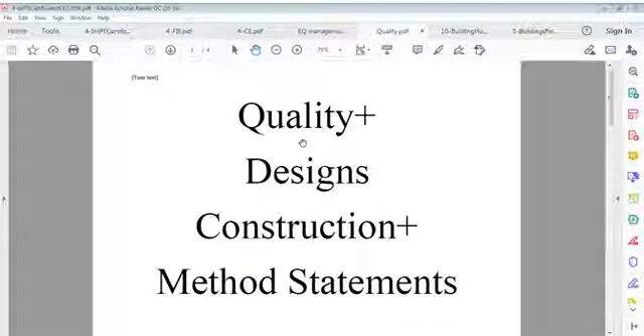But because you can't have experience of structure, you look at finishes, decoration, paint, good work, doors, windows, lifts, service, how fittings are working, electrical fittings, how HVAC working, what is color of this, what floor it is. You concentrate on that rather than asking questions about structure. And that is point where lapse lies in. According to my understanding, lapse lies there.

Where? Structure. Maybe it is building apartment, your plotted house, or flyover, or road construction, it may be sewer line, water line for public use. Wherever you are involved in walking, you walk on footpath every day, you walk in street, you take tap water or drink bottled water, wherever you do whatever, you have many questions and you just sometimes agree on whatever it is, meaning you say oh it's beyond my control.

Yes that is beyond your control. But whatever is within your control, do you take care of that? You don't take care of that. You only pay, okay I am paying, I am booking for this house, I must get it in 3 years. That's what you think, and you think it's a lottery if you get it in time, or you wait for another 3 years. Government knows, public, those agencies who deal with that, they know. And promoter knows, and agent knows, and at end you know that you won't get it in time, even then you pay. You don't realize the merits and demerits, good or bad of that.

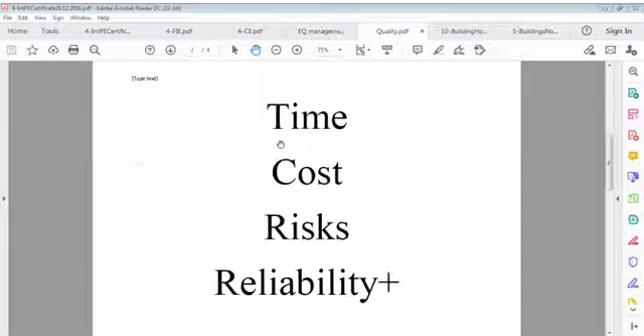So that's the point I like to emphasize: what is quality, what is design, what is construction, what is method statement, what is time, what is cost, what is risks, reliability, what is analysis or synthesis, what is thinking, what is contemplation of application. This is all I wanted to talk of in this way, so that we can at least understand what we are going to do before going further, because this talk is for method statements. That's a very important point we have to consider. I talked yesterday of something, and before yesterday of something else - this is in continuation of all those, that we are here to sit and see what we can do, and that's a very important point.

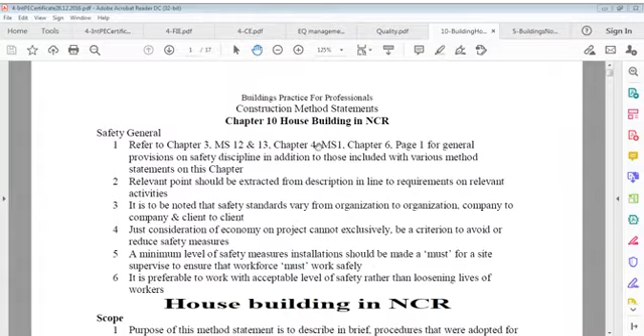So in this case, let us say this is - I say here, this is a building, a non-plant building is here. It's shown as non-plant building, meaning buildings which I talked of, and therefore I also talked of this building - you may say this is building house here, which we talked of. And also I talked of earthquake management, something not directly related to earthquake, but the role of the site engineer is very important in this, which I was talking about - the role of the site engineer.

This is my certification of chartered engineer, just for information. This is my certificate of fellow. I am Institution of Engineers fellow in India. This is my fellow, and this is reapplied now, the old one is gone. This engineer certificate is valid up to 30th September 2020.

I already applied, I didn't get an answer till now, but still I am on roll as International Professional Engineer in India. That means I can use the INTPE India title, under statutory rules, under the International Professional Engineers Agreement, where 15 countries are members, and India, Bharat, is one of them.

Just for your information, this FIE I'm closing now, and also this chartered engineer certificate I'm closing, because it was only for informative purpose, and I can close it.

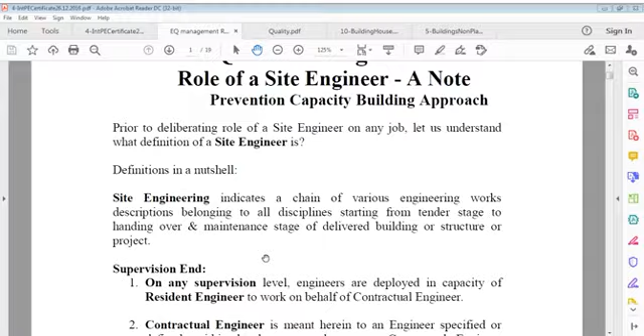Now I'm deliberating again on the role of site engineer, note, prevention, capacity building approach. I defined this yesterday as well, that prior to deliberating the role of site engineer or whatever job, we have to understand what it means. We talked of site engineering - what is it, in a nutshell? It indicates a chain of various engineering works and descriptions belonging to all disciplines, starting from tender stage to handing over and maintenance stage of the delivered building or structure or project.

Then I talked of supervision end and contractual end, where I described what supervision end is - engineer is responsible for supervision, resident engineer is responsible. Engineer is a person defined in the contract, contractual engineer, or engineer defined in contract. It's not a simple title, it's a title in contract.

Contract is a document executed between owner and contractor. Owner is the person whose project it is, who invests money, who takes all liability, whereas contractor is the person to whom work is given to be executed - maybe EPC or construction work, that's called contractor.

So contractor and owner have contractual relations. Owner or promoter, whatever you call that person, has a contractual relation - meaning those two persons have an agreement that exists between owner and contractor. Contractor is second party and owner is first party on contract. That is their contractual relation. It may be a construction contract, design delivery contract, design and construction delivery contract, whatever capacity - so engineer is not a party in that contract.

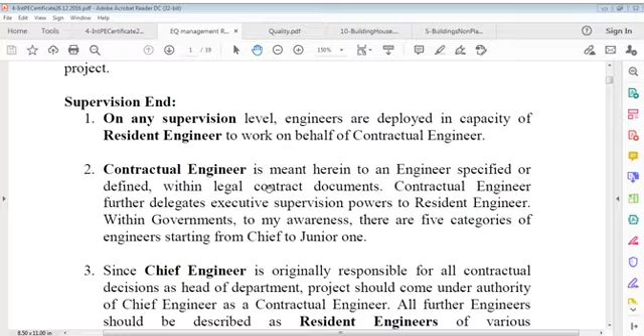I'm not defining our chief engineer, you know that well. The chief engineer is there everywhere in government department, who is a contractual engineer, and employs a chain of engineers who are all subordinates or resident engineers. If you go to construction end, that's where I defined contract, and on supervision end there's another contract.

That was only the purpose that I wanted to explain to you, what it is - you should know how a project works. And of course there's third party consideration, which I will explain to you later on. Now, just briefly, I'm telling you the role of engineer, and role must be written in EQ management in this.

Don't be confused with that, because this was a file I addressed to many engineers in some state in our country, for training engineers for purpose of engineer roles. So don't worry about that. This role of site engineer, whether EQ related or not, exists everywhere.

So engineer is defined as the person responsible for every aspect of contract, not civil alone, all disciplines, including resident engineer, associates, etc., and similarly contractors. So there are two contracts, three parties on every project. Basic fundamental: three parties, three persons, you can say a triangular system.

One corner is owner or promoter or builder, whoever. That is party number one on both contracts - construction contract or EPC contract, or design organization contract, or management services contract. One contract is construction contract between owner and contractor. The other contract exists between owner and engineer, or the engineer may be staff - it doesn't matter.

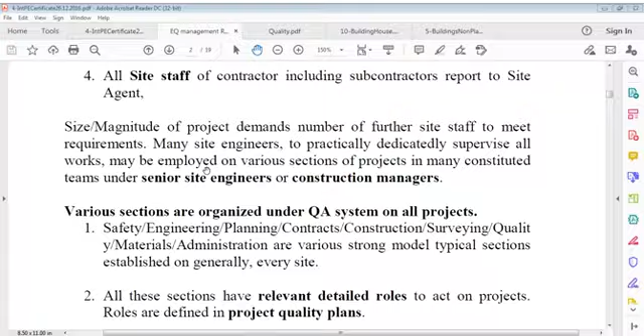Size and magnitude of project demands a number of further site staff to meet requirements. Many site engineers are practically dedicated to supervise all works, may be employed on various sections of projects, and many constitute teams under senior site engineers or construction managers.

Now various sections are organized under a quality system on all projects, and you know this very well, it exists everywhere nowadays. Previously, in the 1980s and 1990s, this was combined work for one engineer - safety plus engineering plus planning plus contracts plus construction plus surveying, all done by one or two persons on site, because in those days there was no such quality system, no existence of that.

So now there is safety, which is number one - not an authority, but number one in precautionary measures, number one in direction. Because wherever you go, wherever you work, safety is considered first. You can't go blankly, you cannot wear slippers and go, you cannot keep your head exposed to weather, you can't do that. You can't just walk in everywhere. You must abide by safety, that's called HSE - health, safety and environment - and also ergonomics.

So you can say health, safety, environment and ergonomics. Health means you should be healthy, you should be safe, you should work in a good environment, and you should use the science or engineering technology of ergonomics. So safety means you should be safe, your subordinate should be safe, your crew should be safe, your site should be safe. That is what safety is - HSE we call it generally: health, safety, environment, and then ergonomics.

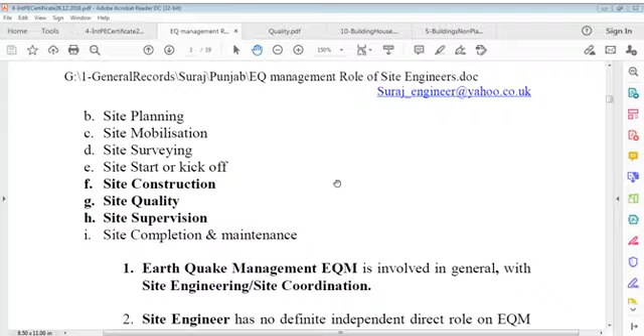Now let's discuss the role of site execution. Based on this discussion, you can see there's planning, mobilization, surveying, kickoff, construction, quality supervision, and completion. Earthquake management is involved in general with site engineering coordination, and the site engineer has no definite independent direct role in earthquake management, but has an indirect role to implement design, engineering and project decisions to comply with the quality system, with strongly extended base support by all responsible discipline sections on the project.

The site quality plan and site safety plan must describe functions as well as supporting roles to all responsible engineers and personnel, officers, directors, everybody. You may call these the project quality plan, project safety plan, and project plan itself - project plan empowers both, and gives you the complete particular plan for that project.

I'm not talking of the general plan of companies or organizations. These three plans - project plan, quality plan, safety plan - are very important. If they are described well, it's fine. Plans give direction, and these can be updated from time to time, for all projects.

Then the site agent's representative is responsible in all respects for site roles, which multiply as follows. First is design review - it is the first involvement to make sure that design specification requirements have been met and included within the design philosophy.

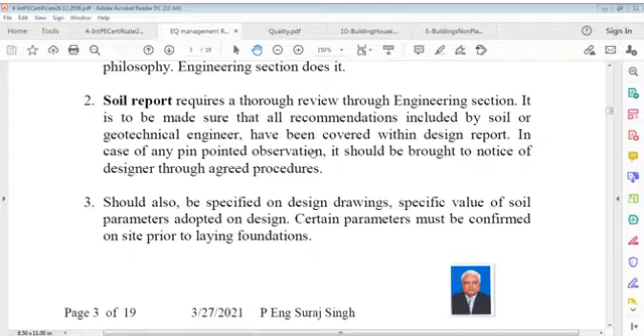The engineering section does this. The soil report requires a thorough review. Through the engineering section, it must be made sure that all recommendations included by soil or geotechnical engineering have been covered within the design report. In case of any pinpointed observation, it should be brought to the notice of the designer through an agreed procedure. It should also be specified on design drawings, a specific value of soil parameters adopted in design. Certain parameters must be confirmed on site prior to laying foundations.

In case localized soil doesn't allow the adopted design parameters, the design should be reconsidered. It's the responsibility of the site engineer to conduct these tests in all major areas of the site using the services of a laboratory or material testing laboratory - it's not written here, but it is like that. The site quality engineer has to be involved for quality accuracy of the test. Any variation from the soil report should immediately be reported to the soil laboratory and designer.

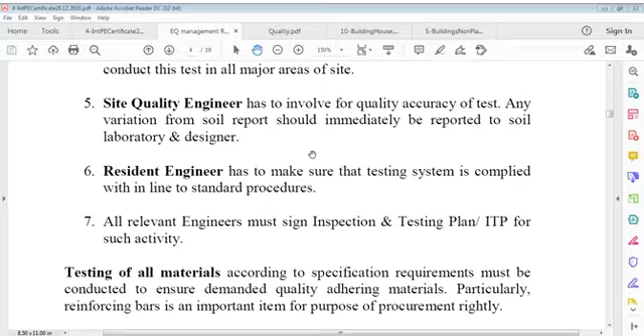The resident engineer has to make sure that the testing system is complied with, and conforms in line with standard procedures. All relevant engineers must sign the inspection and testing plan, called ITP in short, for such activity.

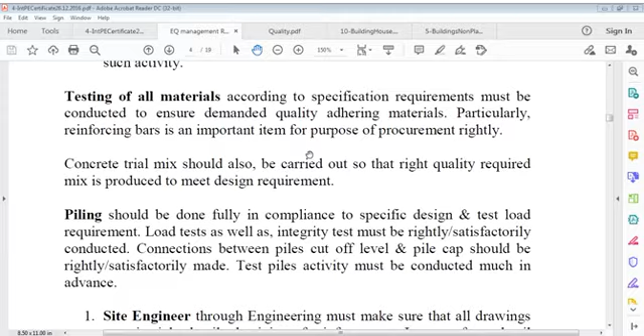Testing of all materials according to specification requirements must be conducted to ensure demanded quality. Adhering materials, particularly reinforcing bars, are an important item for procurement purposes. Concrete trial mix should also be carried out so that the right quality mix is produced to meet design requirements, and piling should fully comply with specific designs and test load requirements.

Load tests as well as integrity tests must be satisfactorily conducted on piles after they are cast in, whether continuous flight or a different type. Connections between piles, cutoff level, and pile cap should be rightly and satisfactorily made. Test piles activity must be conducted well in advance.

The site engineer must make sure that all drawings contain the right detailing of reinforcement. In case any detail is missing, a query should be raised immediately for confirmation. Arrangements must be indicated on typical standard drawings by the designer.

It's very significant for proposed materials to resist earthquake forces, and included materials should conform to standards without any adjustments. No compromise should be made in the quality of these materials.

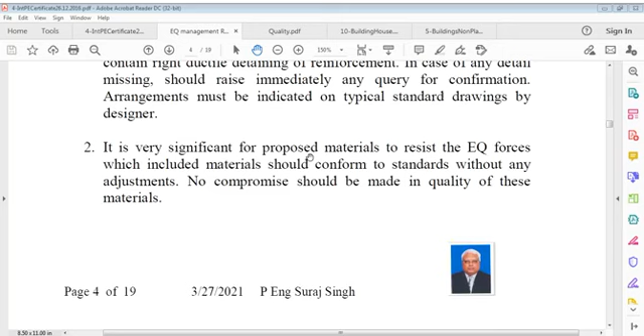Generally, reinforced cement concrete is used in various buildings and is considered in designs. It's therefore significant to produce concrete works of good quality, and no batch of concrete should be allowed to be poured unsupervised.

The site engineer must ensure that whatever precautions are required on site have been explained to all responsible skilled craftspeople, workmen, and the work crew, as well as supervisors like foremen, supervisors, and charge hands.

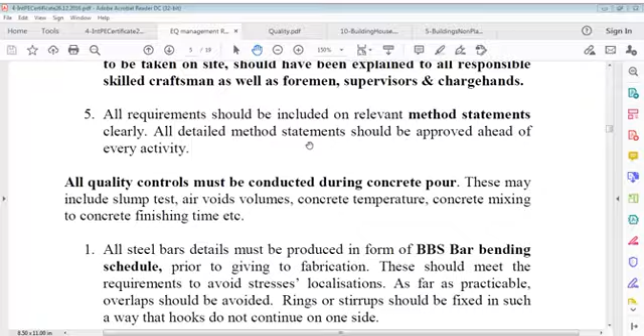All requirements should be clearly included in the relevant method statements. All detailed method statements should be approved ahead of every activity, and no activity should be done without an approved method statement available.

All quality controls must be conducted during the concrete pour. This may include slump test, air voids, volumes, concrete temperature, and concrete mixing to finishing time, etc.

All reinforcing steel bar details must be produced in the form of bar bending schedules prior to fabrication. These should meet requirements to avoid stress localizations. As far as practicable, overlaps should be avoided, and rings or stirrups should be fixed so that hooks do not continue on one side.

It should be remembered that reinforcing bars change behavior drastically during earthquake action. Bars provided for gravity loads start accepting horizontal shear distributed stresses, thereby forcing beams to work partly as columns and columns to work partly as beams.

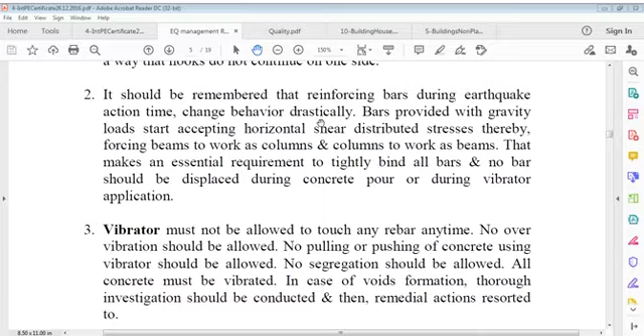That makes it an essential requirement to tightly bind all bars, and no bar should be displaced during concrete pour or during vibrator application.

The vibrator must not be allowed to touch any rebar at any time. No over vibration should be allowed, and no pulling or pushing of the concrete mix using the vibrator should be allowed. No segregation should be allowed, and all concrete must be vibrated. In case of voids formation, a thorough investigation should be conducted and then remedial actions resorted to.

Proper inclusion of concrete spacers, also called concrete covers, should be made at the right location so that rebars stay intact during pouring. It has generally been noticed that this item is neglected by site engineers and other persons. Cover is too serious an issue to be overlooked.

Precast covers, well cured, can be used. Plastic covers, if strong enough to bear the loads of foundation rebars, can also be used.

Formwork should be erected based on correct and safe designs of preparatory works. Safety is of utmost importance, and safety-first criteria should be fully considered and implemented.

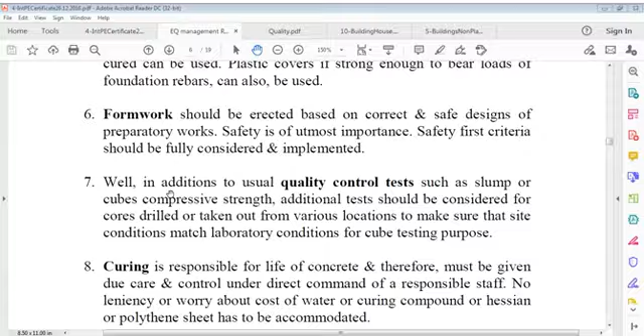In addition to usual quality control tests such as slump or compressive strength cubes, additional tests should be conducted on cores drilled or taken out from various locations to make sure site conditions match laboratory conditions used for cube testing.

Curing is responsible for the life of concrete and must be given due care and control under the direct command of responsible staff. No leniency or worry about the cost of water, curing compound, or hessian or polythene sheet should be accommodated.

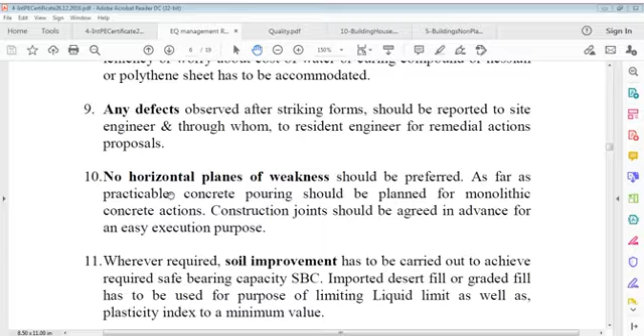Whatever defects are observed after striking the forms should be reported to the site engineer, and through him to the resident engineer, for decisions on remedial action proposals.

No horizontal planes of weakness should be preferred. As far as practicable, concrete pouring should be planned for monolithic concrete actions, and construction joints should be agreed in advance for easy execution.

Wherever required, soil improvement has to be carried out to achieve the required safe bearing capacity. Imported desert fill or graded fill has to be used to limit the liquid limit as well as the plasticity index to a minimum value.

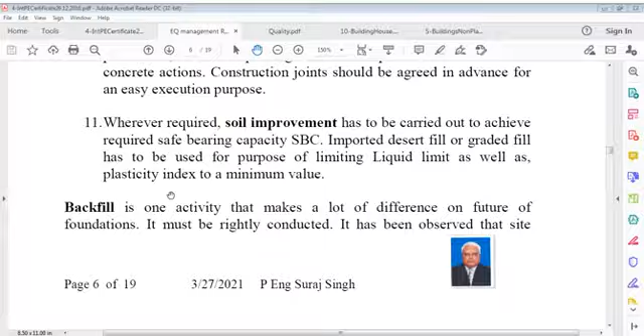Backfill is one activity that makes a lot of difference on the future of foundation. It must be rightly conducted. It has been observed that site engineers try to neglect its supervision and save project time by filling thicker layers than required. It's not a good practice.

Backfill should be in good compliance with agreed specifications to achieve 95 to 98% field density. General fill can be compacted to 90% field density.

Construction sequence should be correctly followed during the scheduling stage. Foundation should be planned, as far as possible, to be cast monolithic. Columns should be cast first. Beams and slabs should be cast one time monolithic. All connections should be done to meet requirements.

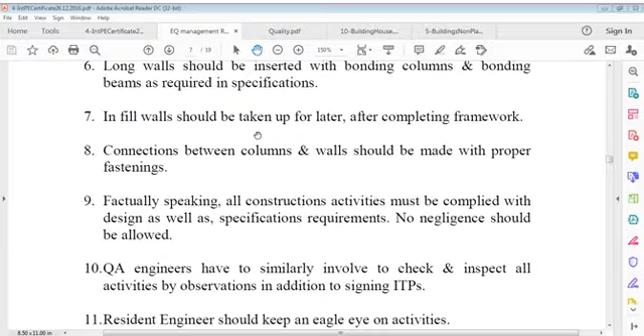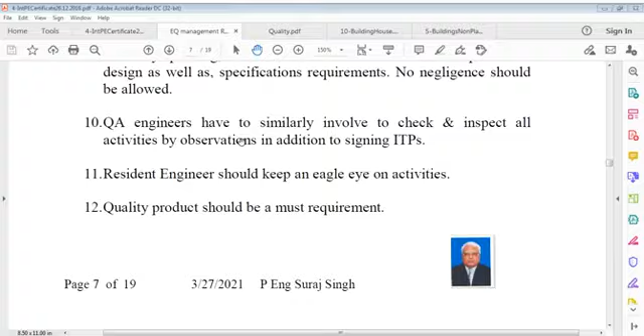Factually speaking, all construction activities must comply with designs as well as specification requirements. No negligence should be allowed. Quality engineers have to be involved to check and inspect all activities by observation, in addition to signing ITPs. The resident engineer should keep an eagle eye on activities. Quality product should be a must requirement.

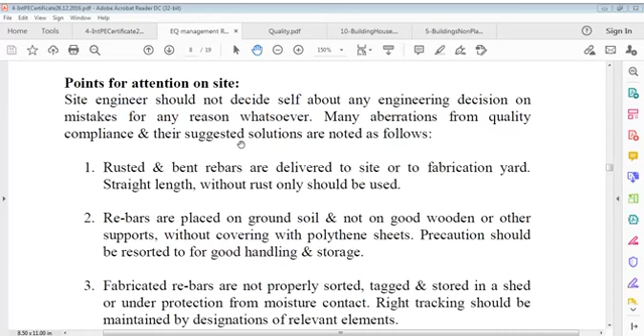Points for attention on site: the site engineer should not decide by itself on whatever engineering design or engineering decision, on mistakes, for whatever reason whatsoever. Many aberrations from quality compliance and their suggested solutions are noted as follows.

Rusted and bent rebars are delivered to site or to the fabrication yard. Straight bars without rust only should be used.

Reinforcing bars are placed on ground soil and not on good wooden or other supports, without covering with polythene sheets. Precaution should be taken for good handling and storage.

Fabricated rebars are not properly sorted out, tagged and stored in shed or under protection from moisture contact. Proper tracking should be maintained by designations of relevant elements.

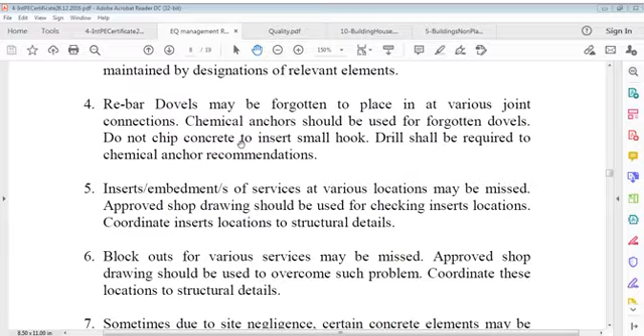Reinforcing bar dowels may be forgotten to place at various joint connections. Chemical anchors should be used for forgotten dowels. Do not chip concrete to insert a small hook. Drilling shall be required per chemical anchor recommendations.

Inserts and embedments of services at various levels and locations may be missed. Approved shop drawings should be used for checking insert locations, and these should be coordinated with structural details.

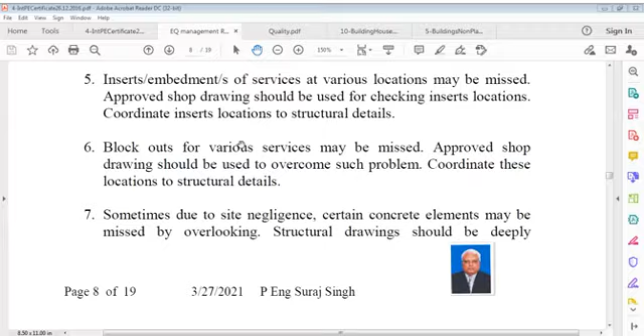Block-outs for various services may also be missed. Approved shop drawings should be used to overcome such problems, with locations coordinated to structural details.

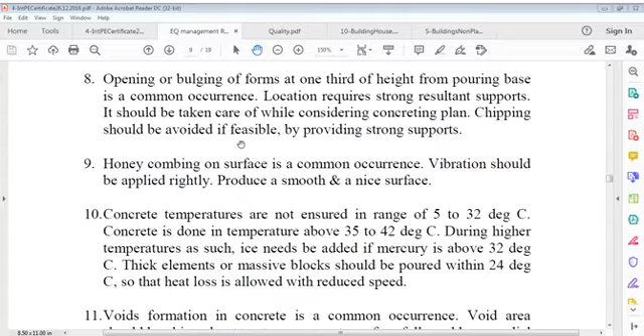Opening or bulging of forms at one-third of the height from the pouring base is a common occurrence. Based on experience, this location requires strong resultant supports. It should be taken care of while planning concreting, and chipping should be avoided if feasible by providing strong supports.

Honeycombing on the surface is a very common occurrence. Vibration should be applied correctly to produce a smooth and nice surface.

Concrete temperature is not always ensured to be in the range of 5 to 32 degrees Celsius; concreting is sometimes done at temperatures above 35 to 42 degrees Celsius. During such higher temperatures, ice needs to be added if the mercury is above 32 to 35 degrees Celsius. Thick elements or massive blocks should be poured within a 24-degree Celsius range so that heat loss is managed with reduced speed and reduced quantity.

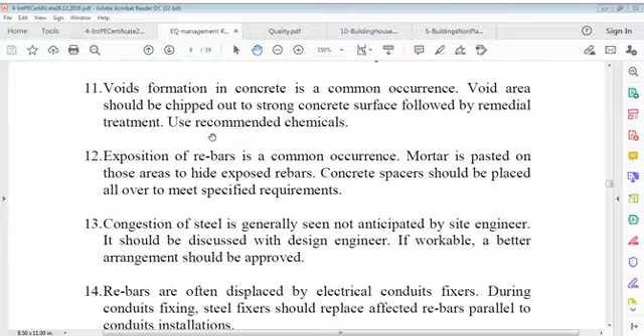Voids formation in concrete is a common occurrence. Void areas should be chipped out or removed down to strong concrete surface, followed by remedial treatments using recommended chemicals or concrete.

Exposure of rebars or reinforcing bars is a common occurrence, and mortar is sometimes pasted on those areas just to hide the exposed rebars. Instead, concrete spacers should be placed all over to meet specified requirements, vibrators should be applied correctly, and the water-cement ratio or mix must be ensured depending on requirements. I have not written all this, but I am telling you what happens - we have to take care of concrete composition and concrete delivery very well, so that we do not create any voids, and there should be no carelessness.

Once one vibrator is done and other concrete comes, it should not be left unvibrated. Every concrete batch is left for half an hour before the next one comes in, so you must vibrate that. Do not leave it unvibrated.

Congestion of steel reinforcement is generally seen, not anticipated by site engineers. It should be discussed with the design engineer, and if workable, a better arrangement should be approved, either reducing reinforcement bars or increasing their size so that congestion is avoided.

Congestion also causes problems. Reinforcing bars are often displaced by electric conduit fixers. During conduit fixing, steel fixers should replace the affected rebars parallel to the conduit installation.

For higher size rebars, overlaps do not work safely and perfectly, and I don't have much confidence in overlaps to that extent. Mechanical connectors should be used instead. Generally, reinforcing bars of diameter 20 mm and above work better when mechanical connectors are employed.

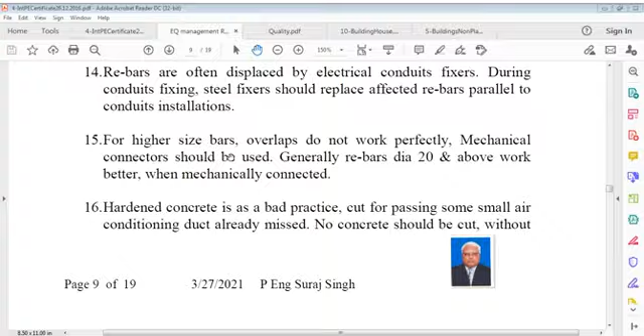As a bad practice, hardened concrete is cut to pass a small air conditioning duct that was already missed. No concrete should be cut without proper investigation conducted by either the design engineer or the resident engineer.

Excessive slump is not reported truly. No information should be concealed, but slump should be tried to be brought down by keeping truck mixers rotating for a couple of minutes. In case it doesn't work, it should not be accepted.

During concrete pouring, due to delay, additional water is sometimes mistakenly or secretly added by some people. No additional cube sample is taken for that added water batch, which is not acceptable practice. If it's allowed, special cubes should be collected for strength confirmation as well as slump testing.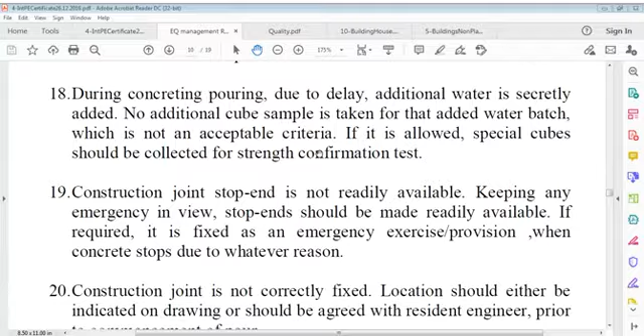Construction joint stop ends are not readily available. You know what a construction joint is - where two concretes meet, meaning we have to stop concrete at one location due to whatever reason or due to design criteria, and then we have to make a proper end. We should not leave it as it is.

There should be a vertical half thickness at the place where you make the construction joint, then horizontal, then another half vertical - a kind of rebate created in that vertical section: half, then rebate, then half, so it's properly done. It's not easy; you have to keep it ready all the time, whether or not you use it, depending on requirement. If it's given on drawings, you have to do it, no other way. But even for an emergency requirement, you have to produce it.

It should be ready-made. Generally this thickness is not done in beams, only in slabs, which may be 150mm, 200mm, 250mm, or 300mm thick. That much stop end and rebate should be prepared. It's not a very big job, even in pieces you can keep it prepared, because there is so much reinforcing steel - half and half you can take, or whatever you can take. Concrete should be confined at that section, that line, and it may be in offset form also, so new concrete should be free of the previous concrete.

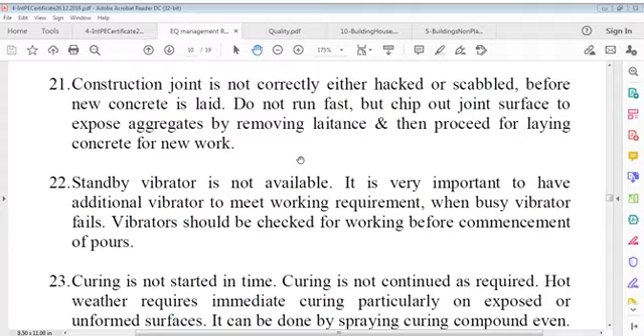Standby vibrator is not available - that's a bad practice. It's very important to have an additional vibrator to meet working requirements. In case of failure of the busy vibrator, you should check it for working before commencement of pours. Both the working vibrator and standby vibrator must be checked to ensure satisfactory operation. Sometimes people ignore it and during vibration it doesn't work.

Curing is not started in time. Curing is really very much the solution for concrete, the life of concrete - it gives durability. Concrete is everything, and curing is - everybody knows what curing is, I need not explain that. Curing is not started in time, and curing is not continued as required.

Hot weather requires immediate curing, particularly on exposed or unformed surfaces. It can be done by spraying curing compound evenly, or a polythene sheet can also be spread on the concrete surface. Curing should be effectively carried out daily by the personal attention of the site engineer.

Curing is not completed for the required period - that's another problem. Do not ignore curing; ignorance can cause a major problem. A non-conformance report, NCR, on this count may have no solution for closing. It's an easy activity to pour concrete, but extremely expensive to dismantle and rebuild.

Now regarding curing, I would say something. When you use water, it's okay, fine - curing water should be usable for construction. But also when you use curing compound for this purpose, we spray it immediately after concreting. It may be damaged by activities, but curing compounds are fundamentally of two types.

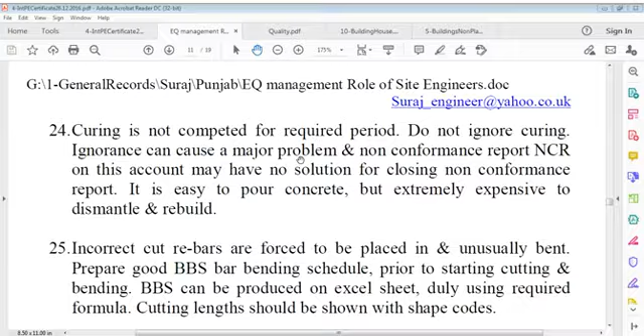Bar bending schedule can be produced on an Excel sheet using the required formula. Cutting length should be shown with shape codes, and that formula is available. It was available in BS 4466. It may be available in BS 8666. I'm not going through that, but it's available, although shape codes have changed and they have extended many codes. BS 4466 is an easy one though.

For example, in that, straight was shape code 20, meaning if a bar is straight, it's just shape code 20. It was 37 if it's L shape, and I think 40 when it's one vertical then little cranked, then vertical, and it was also 61 for ring shape, and 99 for whatever shape. There were so many, maybe about 15 or 20 shape codes, which have been very useful as far as 4466 is concerned. I think 8666 is also good, but I haven't experienced that one because I didn't get the opportunity to work on it.

Our formula is 4466 on my Excel sheet, and it's very effective. I just use bar diameters and then formula A, B, C, D, E - whatever length it is - you can write in that. The formula is fixed in your Excel cells, and then the cutting length is drawn. After that, you can find the total sum of cutting length, and you can find the weight after adding 5%, which can also account for wastage later on.

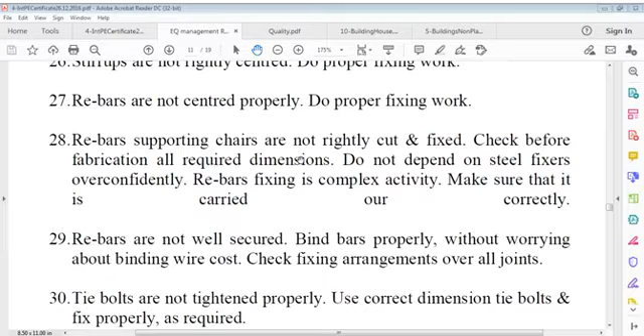Stirrups or rings are not rightly centered - do proper fixing work. Reinforcing bars are not centered properly - do proper fixing work. Reinforcing bar supporting chairs are not rightly cut for upper level steel - not slab level steel, upper level steel, compression steel properly. Rebars supporting chairs are not rightly cut and fixed. Check all required dimensions before fabrication. Do not depend on steel fixers overconfidently.

Rebars or reinforcing bar fixing is a complex activity - make sure it's carried out correctly. Reinforcing bars are not well secured - bind bars properly without worrying about binding wire cost. Check fixing arrangements over all joints.

Now, tie bolts are not tightened properly. Tie bolts - you know what tie bolts are? Bolts are fixed in beams or in columns, externally or internally. It goes through beams internally, and also into columns externally as well as internally, depending on your environment. It doesn't go through slabs, only through beams and columns. Tie bolts are also used in other bigger sections like lift forms and walls.

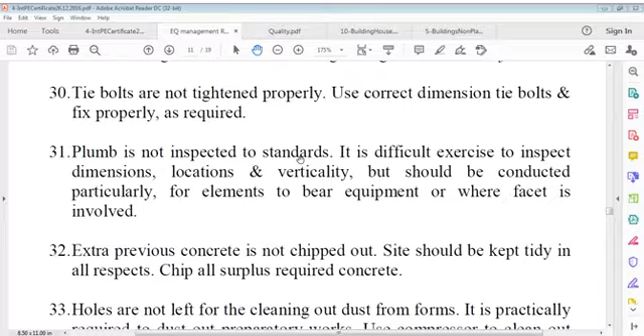Plumb is not inspected to standards. It's a difficult exercise to inspect dimensions and locations and verticality, but it should be conducted, particularly for elements that bear equipment or where facade is involved.

Extra previous concrete, meaning the past, is not chipped out. Sites should be kept tidy in all respects and clean. Chip all surplus required concrete, otherwise once it's hard, it's difficult to chip.

Holes are not left for cleaning out dust from forms, particularly in vertical members. It's practically required to dust out preparatory works, so use a compressor to clean out preparatory works.

Flash setting is not prevented. This is a very important and practical item: flash setting, F-L-A-S-H, is not prevented.

Use water to be sprayed on forms to keep temperature low before concreting starts. When the steel bar is hot and concrete is cold, this combination generates flash setting of concrete, which should be avoided. Also, your shutters may be hot for whatever reason. Plywood may not get hot, but if you use steel plates, it's the same as steel rods or bars. So if plates are also hot and concrete is in a temperature range of less than 32 degrees, while the steel may be 50 degrees...

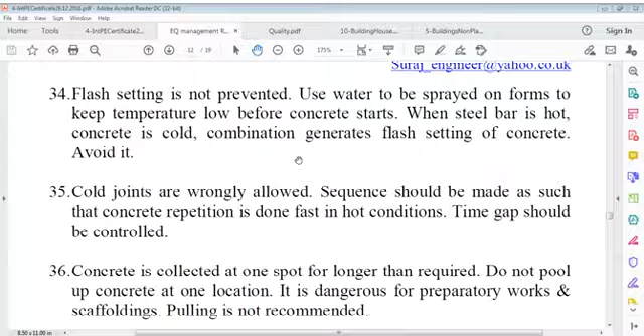Use water to be sprayed on forms to keep temperature low before concreting starts. When the steel bar is hot and concrete is cold, this combination generates flash setting of concrete, which is avoided.

Cold joints are wrongly allowed - that's now a special item. The cold joint sequence should be made such that concrete repetition is done fast in hot conditions. The time gap should be controlled first regarding cold joints. Why do we call them cold joints? When there are two batches of concrete with a gap in between them, that's the point where cold joints are formed.

Say you did concreting, vibrated it and left it, or you forgot to vibrate even. Unless there's a gap of half an hour, one hour, or by chance 1.5 to 2 hours where the next batch is not ready or available and you have to receive it later, you don't care about anything else. So whether you vibrated and left it, or didn't vibrate at all, you have to be very careful. Even if you did not vibrate, if there's a delay in the next batch arriving, immediately vibrate - don't wait even 10-15 minutes. If you wait 10 minutes and see it doesn't come, fine, but after 10-15 minutes setting time starts, so immediately apply the vibrator, don't wait.

Even with a lapse of 10 or 15 minutes, if you don't apply the vibrator, the concrete starts hardening and it will cause voids or honeycombing or other problems. It's no use - it will cause problematic concrete. So it's better not to forget to apply the vibrator, and suppose there's a delay in concrete arrival, act immediately.

Once concrete starts setting, you can't lay new concrete on it. If you do, it creates a cold joint, because the laid concrete is already cold while the new concrete is hot, and there's a temperature difference between the two.

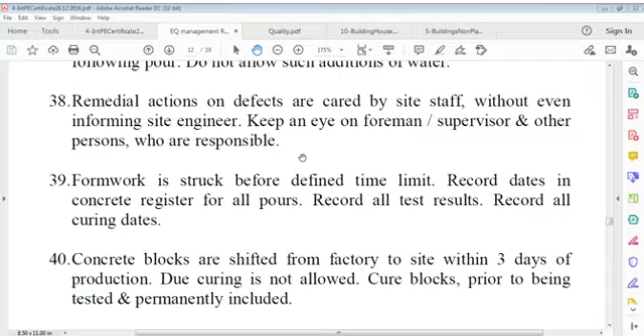Formwork is sometimes removed or struck before the defined time limit. Record dates in the concrete register for all pours. Record all test results, all curing dates, and whatever else is possible, because it may be used for investigation purposes in the future.

Now, concrete blocks, whether hollow or solid, are shifted from the factory to the site. Sometimes they're shifted within 3 days of production due to shortage of space in the factory and heavy requirements on projects.

Due curing is not allowed in this case, meaning whatever curing these blocks require isn't being done. Concrete requires curing according to concrete requirement philosophy.

Due curing is not allowed, so cure the blocks prior to them being tested and permanently included. What happens is, when you bring them in after only 3 days and send them for testing, they will certainly fail, because at 3 days they can't pass.

So think of asking the block manufacturer for the day of production at delivery. If you know the day of production, you can tell whether it's 3 days old or 10 days old, and whether it was cured or not, and curing can then be completed on site.

So this causes problems, and I experienced this issue during my career. That's why I'm reflecting on it here.

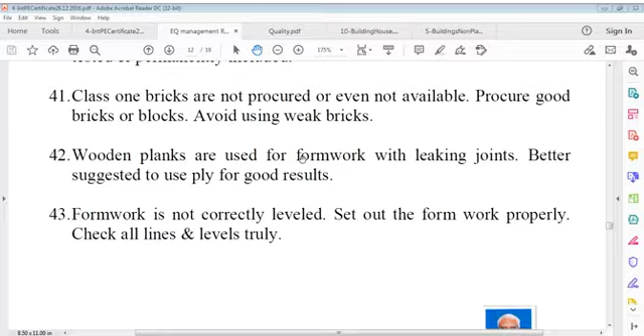Wooden planks are used for formwork. I don't like it, but here people do it. Wooden planks which are not even well edged, well plain edged. There's a gap between all; wooden planks are used for formwork with leaking joints. The gap is there, leaking joints. Better to use ply for good results.

If you have repetition, ply can be used 4 to 6 times. If it's commercial ply, it can be used 4 times. If it's marine ply or waterproof ply, it can be used up to 5-6 times, or 5 or 4 times. You can plan accordingly depending on whatever surface area you have to shutter, and buy accordingly.

Formwork is not correctly leveled. Set out formwork properly, check all lines and levels truly.

Now, grouting of structural steel bars. Grouting of structural steel bars that are generally RCC foundations requires good control as it's cement-based material. Similarly, grouting for under-anchorage plates requires good controls.

Grouting can be done by cement when the machine or vessel is stationary. It can also be epoxy mortar when it is a vibrating machine.

Do not go ahead for any work where doubts exist, either in specifications or in design. Obtain clarified answers in the form of site technical queries before carrying out ambiguous items. So do not go ahead for any work where doubts exist, either in specifications or in design. Obtain clarified answers in the form of site technical queries before carrying out ambiguous items.

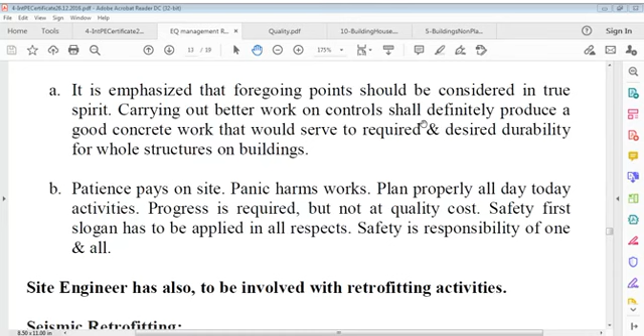Patience pays on site, no panic, right? Patience pays on site; panic harms work. Plan properly all day-to-day activities. Progress is required but not at the cost of quality. Safety first slogan has to be applied in all respects. Safety is the responsibility of one and everyone.

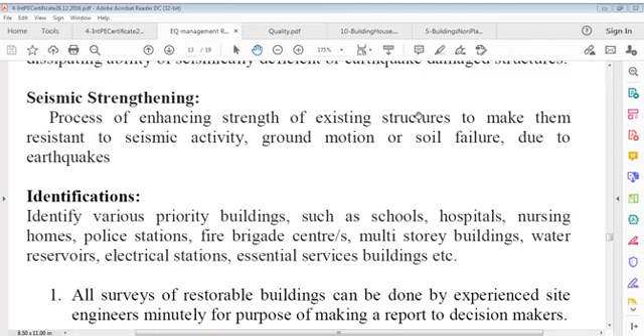Site engineers also have to be involved with retrofitting activities. Seismic retrofitting involves structural modifications to upgrade strength, ductility, and energy dissipating ability of seismically deficient or earthquake-damaged structures. Seismic strengthening is the process of enhancing the strength of existing structures to make them resistant to seismic activity, ground motion, or soil failure due to earthquakes.

Identifications: identify various priority buildings such as schools, hospitals, nursing homes, police stations, fire brigade centers, multi-story buildings, water reservoirs, electrical stations, essential services buildings, etc.

All surveys of restorable buildings can be done by experienced site engineers minutely for the purpose of making a report to decision makers.

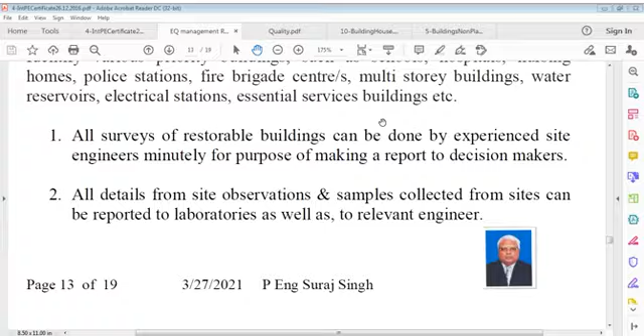All details from site observations and samples collected from sites can be reported to laboratories as well as to relevant engineers. It requires an extensive grasp of field knowledge of the state of concrete materials.

Recording can be done by photographs and video, taking all measurements of locations of deteriorating areas.

Hand excavation should be carried out to collect foundation samples of old concrete. Rebar or reinforcing bar samples can also be collected from non-critical areas, which requires a good study of the structure, either from records or from site surveys.

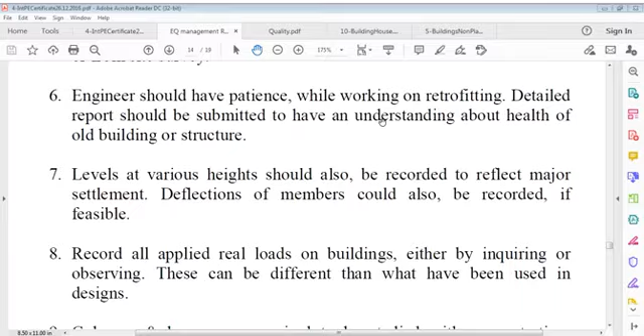Engineers should have patience while working on retrofitting. A detailed report should be submitted to have an understanding about the health of the old building or structure. Levels at various heights should also be recorded to reflect major settlement. Deflections of members could also be recorded if feasible.

Record all applied real loads on buildings either by inquiring or observing. These can be different than whatever have been used in designs.

Columns and beams are required to be studied with concentration. Strengthening of these members shall be very difficult. Check all deformations and deterioration. You may have to apply jacketing and so many other measures; you will find cracks, deterioration of concrete, or loss in strength. There could be whatever reason for that.

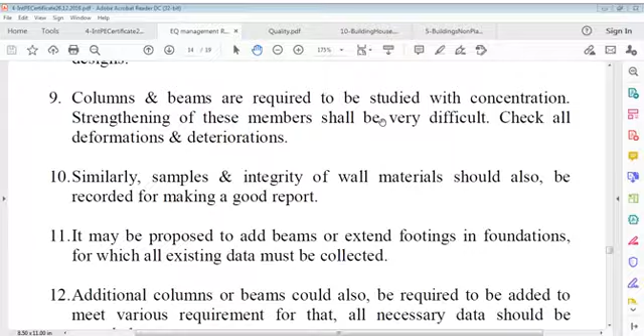Similarly, samples and integrity of wall materials should also be recorded for making a good report. It may be proposed to add beams or extend footings in foundations, for which all existing data must be collected. It's not easy. Additional columns or beams could also be required to meet various requirements, for which all necessary data should be recorded in the report.

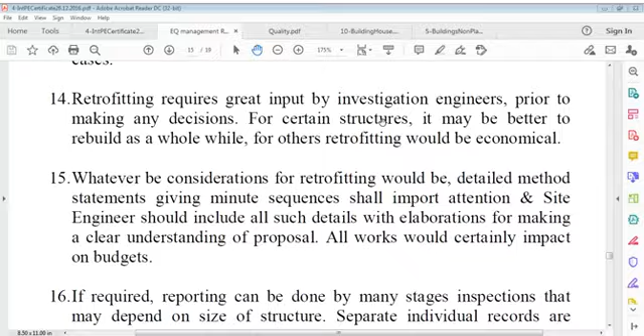Retrofitting could also demand provisions of composite sections into existing ones. Careful study and understanding is required for all such cases. Retrofitting requires great input by investigation engineers prior to making whatever decisions. For certain structures, it may be better to rebuild as a whole, while for others retrofitting would be economical.

Whatever the considerations for retrofitting, detailed method statements giving minute sequences shall be important, and the site engineer should include all such details with elaborations for making a clear understanding of the proposal. All work would certainly impact the budget.

If required, reporting can be done by many stage inspections that may depend on the size of the structure. Separate individual records are suggested to be made for a proper audit. A complete audit should be worked out.

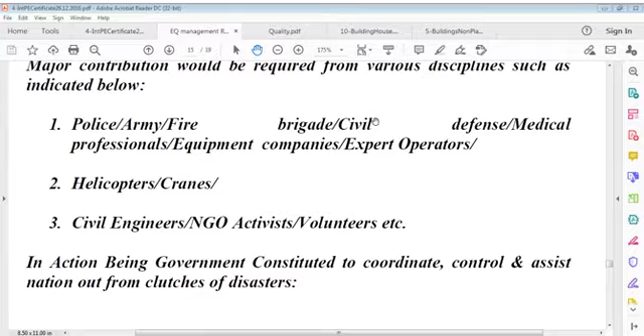Post-earthquake disaster management: no one can control disasters, whether caused by earthquake or other calamities. Preparedness to mitigate whatever disaster is required, and everybody should be ready to accept responsibility. Major contribution would be required from various disciplines such as police, army, fire brigade, civil defense, medical professionals, equipment companies, expert operators, helicopters, cranes, civil engineers, NGOs, activists, volunteers, etc.

A government body is constituted to coordinate, control and assist the nation out from the clutches of disaster - the National Disaster Management Authority. Its vision should be zero tolerance to avoidable deaths due to earthquakes. Its mission is to formulate guidelines for preparation of plans to reduce earthquake risks and minimize impact, loss of lives, and damage to property caused by earthquakes.

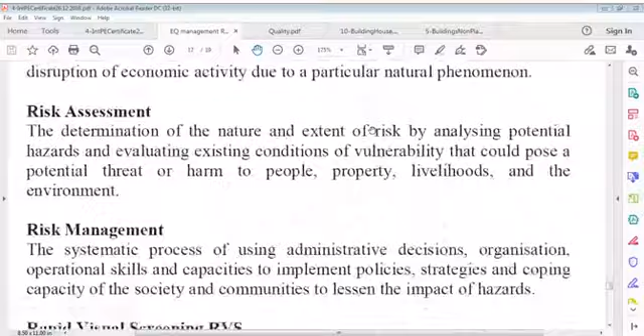Then there are term definitions: disaster, hazard, health, high risk areas, disaster management, mitigation, non-structural measures, preparedness, risk assessment, risk management, rapid visual screening. This will take a while, but you can read it in just two to three minutes - it's just for your knowledge addition, not very long, just a couple of pages.

Disaster: a catastrophe, mishap, calamity or grave occurrence in any area, arising from natural or man-made causes, or by accident or negligence, which results in substantial loss of life or human suffering, or damage to and destruction of property, or damage to and degradation of environment, of such a nature or magnitude beyond the coping capacity of the community of the affected area.

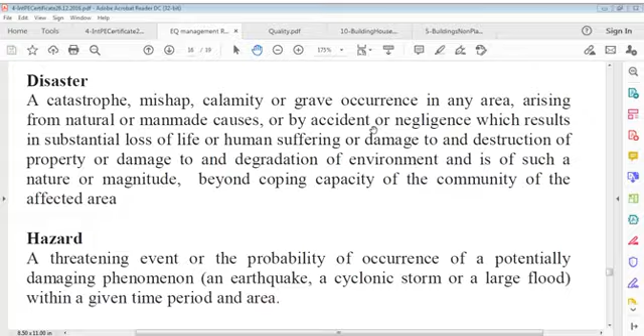Hazard: a threatening event or probability of occurrence of a potentially damaging phenomenon, such as an earthquake, a cyclonic storm, or a large flood within a given time period and area.

High risk areas: geographical areas which fall under seismic zones in Bharat, India - zones 3, 4 and 5 - which are vulnerable to potential impact of earthquakes, landslides, rock falls and mud flows.

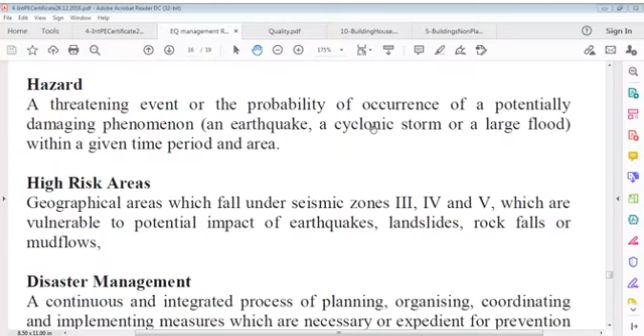Disaster management: a continuous and integrated process of planning, organizing, coordinating and implementing measures which are necessary or expedient for prevention of danger or threat of any earthquake-caused disaster, mitigation or reduction of risk or severity of consequences of any disaster - measures aimed at reducing the risk, impact, or effect of a disaster or threatening disaster situation.

Capacity building: preparedness to deal with whatever disaster, prompt response to a threatening disaster situation or disaster, assessing severity or magnitude of effects of the disaster, evacuation, rescue and relief, and rehabilitation and reconstruction.

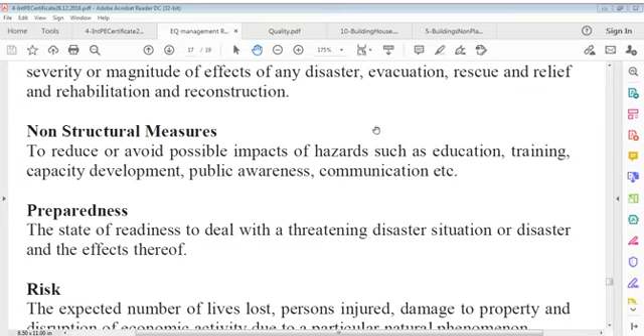Non-structural measures: measures to reduce or avoid possible impacts of hazards, such as education, training, capacity development, public awareness, communication, etc. Preparedness: the state of readiness to deal with a threatening disaster situation or disaster and its effects.

Risk: the expected number of lives lost, persons injured, damage to property, and disruption of economic activity due to a particular natural phenomenon. Risk assessment: determination of the nature and extent of risk by analyzing potential hazards and evaluating existing conditions of vulnerability that could pose a potential threat or harm to people, property, livelihoods, and environment.

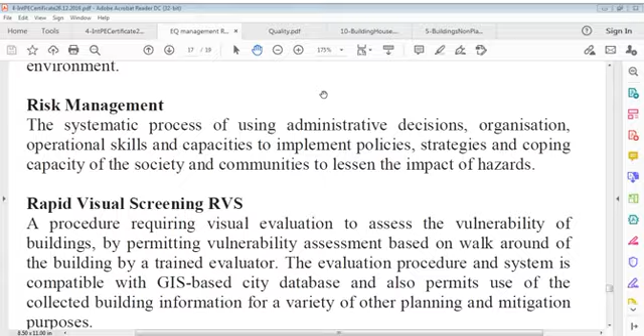Risk management: the systematic process of using administrative decisions, organization, operational skills and capacities to implement policies, strategies, and coping capacity of society and communities to lessen the impact of hazards.

Rapid visual screening, that's obvious - a procedure requiring visual evaluation to assess vulnerability of buildings, permitting vulnerability assessment based on a walk around of the building by a trained evaluator. The evaluation procedure and system is compatible with GIS-based city database and also permits use of collected building information for a variety of other planning and mitigation purposes.

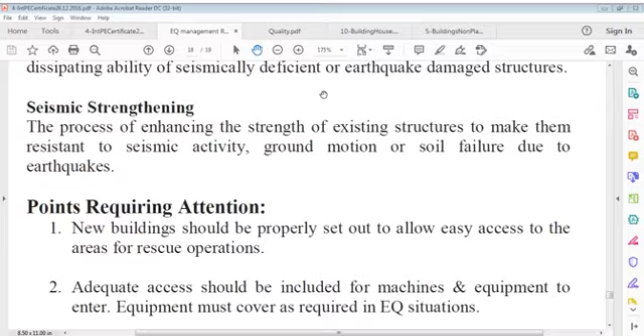The expected degree of loss due to a particular natural phenomenon can be assessed in whatever area. Seismic retrofitting involves structural modifications to upgrade strength, ductility, and energy dissipating ability of seismically deficient or earthquake damaged structures. Seismic strengthening is the process of enhancing the strength of existing structures to make them resistant to seismic activity, ground motion, or soil failure due to earthquake. This is a point requiring attention.

New buildings should be properly set out to allow easy access to areas for rescue operations. Adequate access should be included for machines and equipment to enter, and equipment must cover as required in an earthquake situation. Buildings should be located away from main roads, and streets should be wide for easy access of vehicles and equipment. Priority and essential buildings should be in the vicinity. Standby generator plants should be provided to meet supply failures, and firefighting lines should be available during emergencies. Roads should be resistant to earthquake forces.

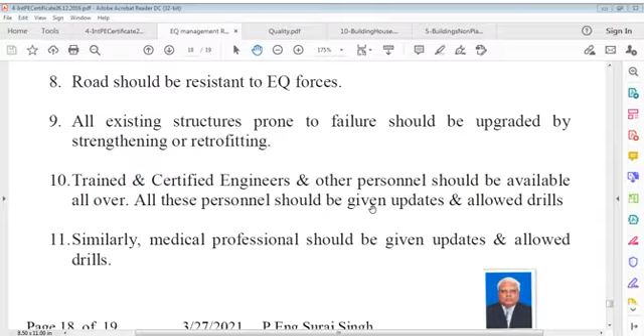All existing structures prone to failure should be upgraded by strengthening or retrofitting. Trained and certified engineers and other personnel should be available all over, and should be given updates and allowed drills. Similarly, medical professionals should be given updates and allowed drills. All other relevant professionals and others should also be updated and allowed drills. The general public should be kept well informed and educated about methods to respond during such earthquake emergencies without panic.

Engineers can do this job very well. Owners should be educated about the benefits of including earthquake resistant design provisions on new structures, and engineers can explain this well to the public. Similarly, engineers can demand from architects that they include earthquake requirement provisions on new buildings, in the public or private sector. Engineers can also deliver lectures in schools and colleges about earthquake requirements, methods, and the role of children and the public involved.

This is another one, I think. Same thing, I'll let you see that role, the earthquake management role. There was another role, I think. So that I am... project management, I hope. Okay, let me see which one that is. Project management. Let us open this document.

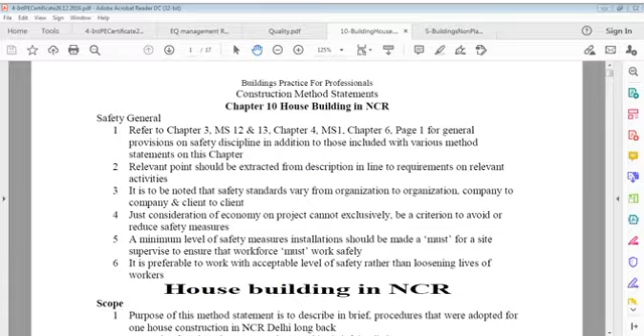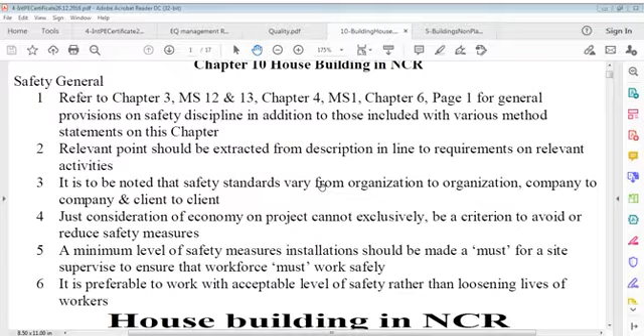This is a house constructed long back near Delhi, in Faridabad. It is really an important issue. I'm sure the purpose of this method statement is to describe something, so let us first see what he wrote in that. Refer to the safety chapters, MS 12, so we'll take care of that, don't worry. My purpose is different: safety standards have to be followed. Don't compromise safety to keep things economical, that's not purposeful. Considering economy on a project cannot exclusively be the criteria to avoid safety. This is what I talked to you about yesterday.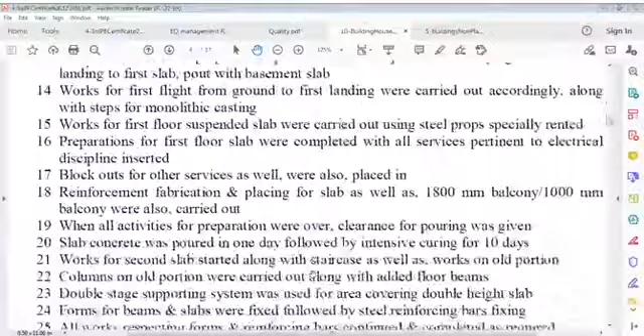This was the house. Let me go through this page first, just 17 pages: design method and procedures we did, safety, references, materials and methods, excavation, blinding, foundation, basement walls, ground floors. Then you can say various actions, various activities, and of course what we did on that.

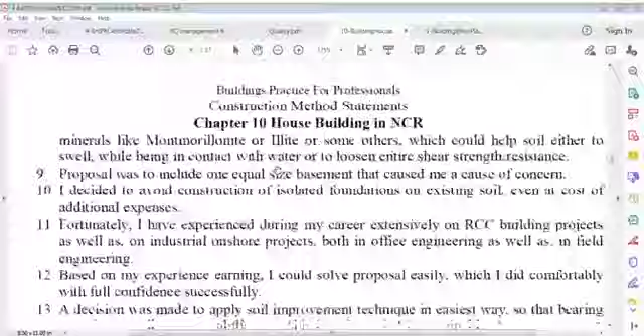Then we go further and see what else we did specifically in this.

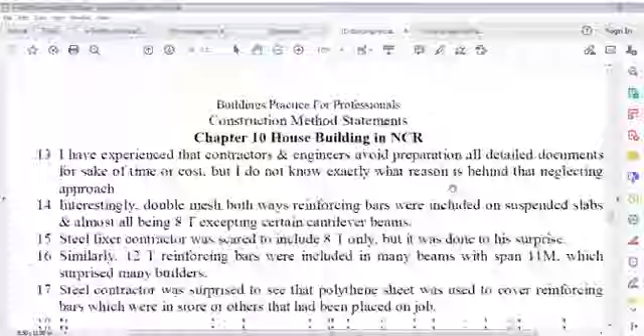But we crossed fast, I think, better.

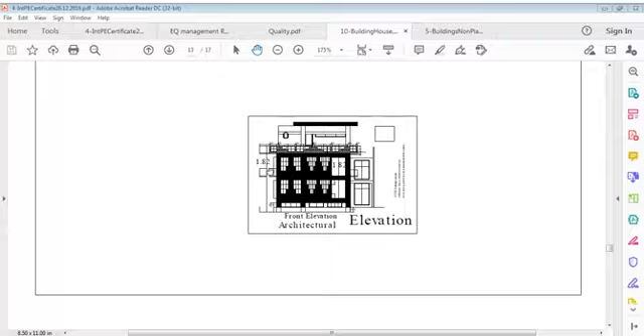This is the rooftop, and this parapet here. You can see these windows again, this basement ventilation here.

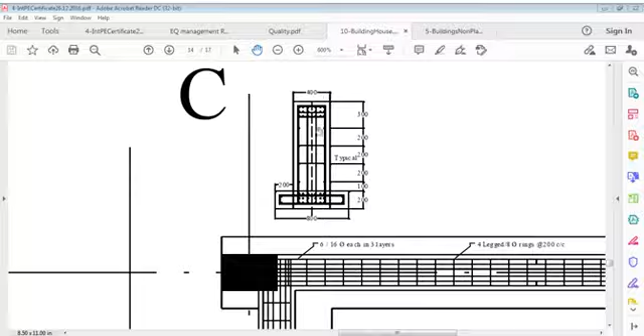This is just this beam connecting all columns, and columns, super or dwarf column, or you can say stub column, will start from here, the steel of the column will go inside, and you can see these are the main bars, generally 16 mm diameter, and this is the spreader here. You can say kind of a damper, the horizontal force will be resisted by this ring here, steps, and all this.

You may ask how many bars are there, and this is just the foundation continuously as seen in this plan. You can see here this plan, all columns are connected, all columns are connected here.

Of course, the beam designs and reinforcements are different, but I'm just indicatively showing you what this is. And that is what it is, this beam section, and here these beams are continuously moving around here like this.

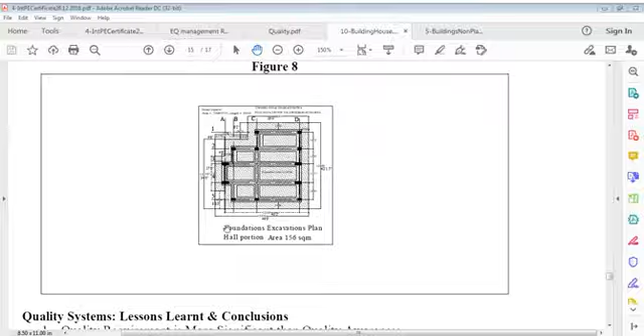That was what I did. Then here is, this is of course the same. Here is the excavation area. Of course there is an access here on the ground, but this is just for indicative purpose. That's what we did.

And these are beams here, but this is all excavation. There is no beam excavation, all excavation, the whole area was excavated, and this was done. The excavation plan was constructed like this, and there was this driveway and the offset. So we just proceeded with one construction access here from ground to basement.

Now we can say that some lessons were learned, and what were those lessons? We will talk of that in this. You can see this is the purpose of this. Let's end off this brief note.

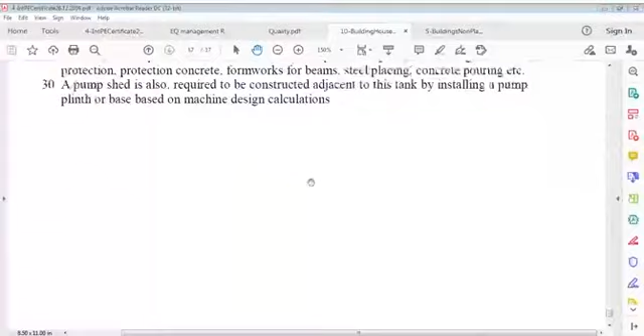Now I would like to go back and tell you, as a kind of revision on this paper, what we did and how we did it. I'll explain it closely, not sentence by sentence. This house was built in NCR, National Capital Region, which is an important point. The purpose of this method statement is to describe briefly the procedures adopted for this house construction in NCR, Delhi, long back.

Synopsis of engineering construction provides brief details: basement, ground, first, second floor and penthouse. Penthouse or second floor, same here. So basement plus ground plus first plus second - all RCC structures from basement to penthouse, including RCC basement walls.

Walls in brick at all levels, only for cladding purpose, not for structural purpose. Doors and windows are aluminium, for the new structure. The existing old structure is about 80 square meters with wooden doors and RCC structures. The design of the whole building, all disciplines, includes connection to the old building.

Now what method did they actually adopt? That's the point we have to talk about now. All design disciplines were conducted self, without any aid from an architect. Setting out, architectural plans, elevations, sections and detailing were all conducted self.

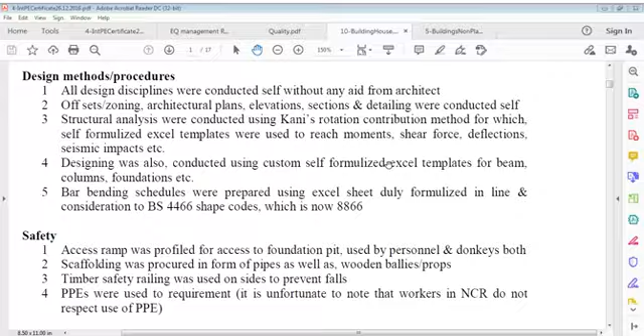Structural analysis was conducted using Kani's rotation contribution method, for which self-formulized Excel templates were used to reach moments, shear force, deflections, seismic impacts, etc. Designing was also conducted using custom self-formulized Excel templates for beams, columns, and foundations.

A bar bending schedule was prepared using an Excel sheet, duly formulized in line with and in consideration to BS 4466 shape codes, which is now BS 8666. Safety.

An access ramp was profiled for access to the foundation pit, used by both personnel and donkeys, workers both. Scaffolding was procured in the form of pipes as well as wooden ballies and props. Timber safety railing was used on sides to prevent falls, and PPEs or personal protective equipment were used as required. It's unfortunate to know that workers in NCR do not respect the use of PPEs. An access ramp was provided. Now, drawings were included within the synopsis, which I have told you.

Now, what specification - general, international, national - both were used. It says now local materials from various sources are procured for all activities. Structural materials and ingredients were procured from Pali crushers/quarries. Reinforcing bars were procured in full length, as 12 or 14 meters, without being bent.

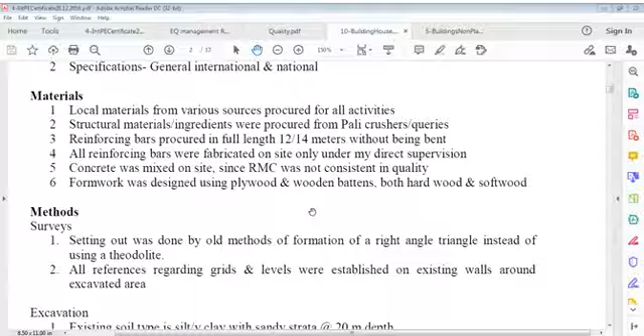All reinforcing bars were fabricated on site only, under my direct supervision. Concrete was mixed on site. Since RMC was not consistent in quality, formwork was designed using plywood and wooden battens, both hardwood and softwood.

Setting out was done by the old method of forming a right angle triangle instead of using a theodolite. All references regarding grids and levels were established on existing walls around excavated areas. The existing soil type is silty clay with sand, strata 20 meters depth. No dewatering was required since the water table is much below.

An excavator, JCB equivalent, was utilized for excavations up to limited depths and limited setting out. The reason was that on three sides buildings existed which did not permit full excavation by machine, requiring manual means for further work. Donkey workers and masters were used for the remaining excavation to reach formation level.

Excavated material was removed from site immediately as and when it was dropped into a truck, onto a tractor trolley, or into temporary stockpiles. Sides of excavation were protected from erosion by covering with polythene sheet so that rainwater does not help loosen strength in this case.

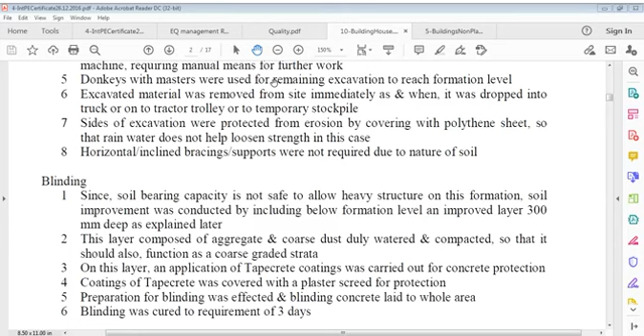Horizontal/inclined bracing supports were not required due to the nature of the soil. Since soil bearing capacity was not safe to allow heavy structures in this formation because of the clay, soil improvement was conducted by lowering the formation level and adding an improved layer of 300mm thickness, as explained later.

This layer was composed of aggregate and coarse dust, duly watered and compacted so that it should also function as a coarse graded strata. On this layer, an application of Tapecrete coating, or polymerized cement, was carried out for concrete protection. This coating was covered with a plaster screed for protection.

Preparation for blinding was effected and blinding concrete laid to the whole area. Blinding was cured for a requirement of 3 days. Foundation.

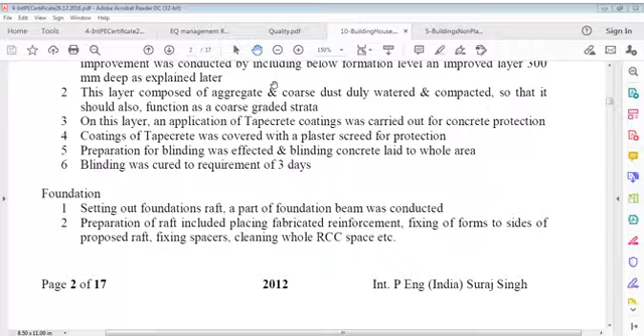Setting out for the foundation raft, part of the foundation beam, was conducted. Preparation of the raft included placing fabricated reinforcement, fixing of forms to sides of the proposed raft, fixing spacers, and cleaning the whole RCC space.